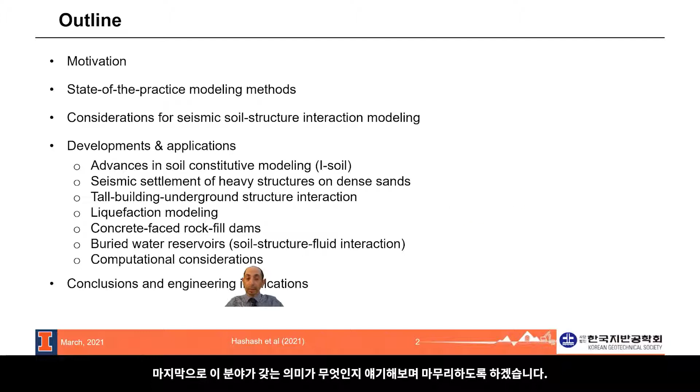Why are we interested in this? Our physical infrastructure is the backbone of modern society. We're interested in understanding its performance and resilience under extreme events, in this case under earthquake shaking. We're dealing with high-rise buildings, underground structures, deep foundations, bridges, and piers, and all of these end up interacting with the surrounding ground and with each other. We need to understand how these interactions impact the overall performance of our infrastructure.

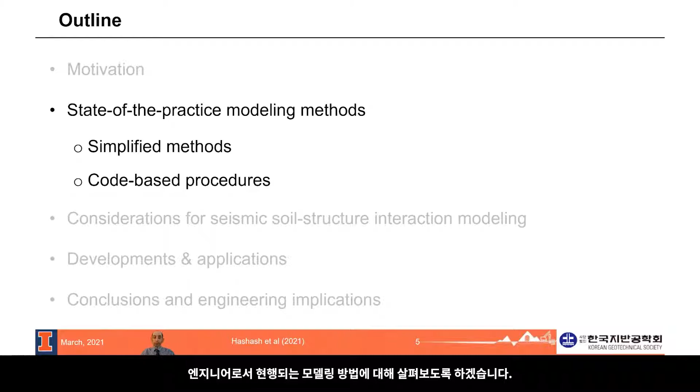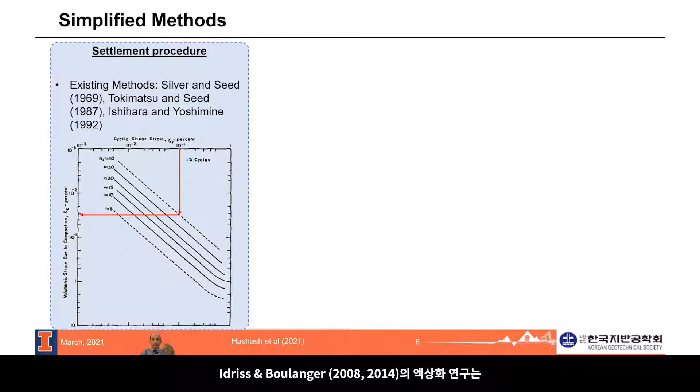Now let's talk about a sampling of state-of-the-practice modeling methods available to us as engineers to address these problems. We have a number of simplified methods. For example, for soils, we have simplified methods to estimate strain due to seismic shaking of sands, and from that we can estimate settlements. But this is decoupled from the superstructure that is, for example, placed on top of the sand.

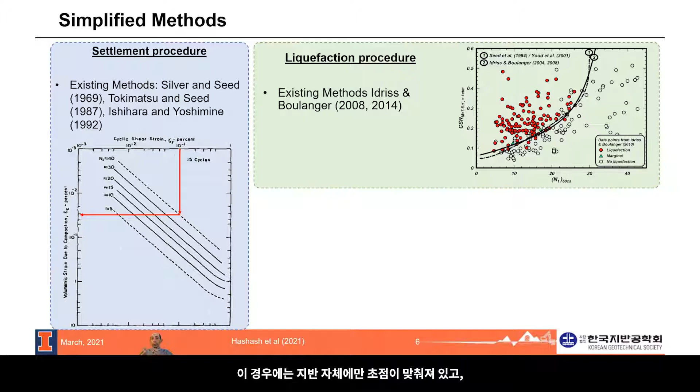Liquefaction procedures are widely used, for example procedures by Idriss and Boulanger, and we use them to evaluate whether soil is likely to experience liquefaction or not. But this is only focusing on the soil itself. There is no interaction here with the structure.

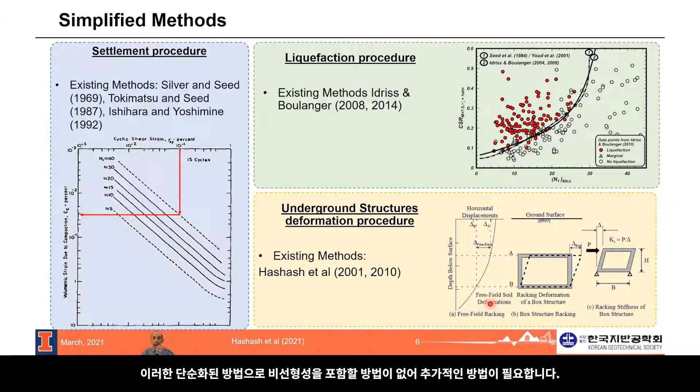These are some methods we developed for looking at the seismic interaction of underground structures. They are simplified: we apply racking displacements, and depending on the relative stiffness, we are able to estimate the deformations of the structure. But these methods are predicated on relatively small strains and elastic response of the structure, so we do not have in them the ability to incorporate nonlinearity using these simplified methods.

We need to do more. Codes are rich with procedures for evaluating structural response, all the way from a fixed base model to a complete system where you have a full soil structure interaction model. But nevertheless, the best way to do that using these simplified spring and dashpot methods is difficult, cumbersome, and often fraught with uncertainties due to our inability to characterize well these springs, for example.

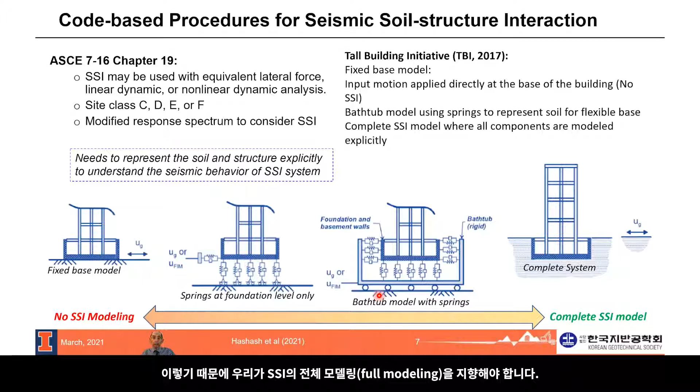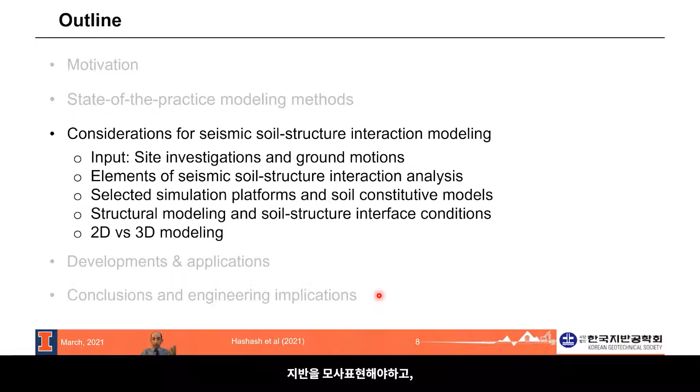So we need to model everything together, and that is really why we need to move into full modeling of the soil structure interaction to capture the behavior of interest to us. Now let's talk about the elements, the ingredients we need to conduct this type of modeling. We need to represent the soil, the structure, and the ground motion. In order to do an adequate soil structure interaction analysis, it is important that we do detailed site investigation whereby we characterize the ground and understand the stratigraphy and the soil properties of interest.

Now, why is the shear wave velocity important? Because it represents the maximum stiffness of the soil. The shear modulus is equal to rho times Vs squared, Vs being the shear wave velocity, so it's critical.

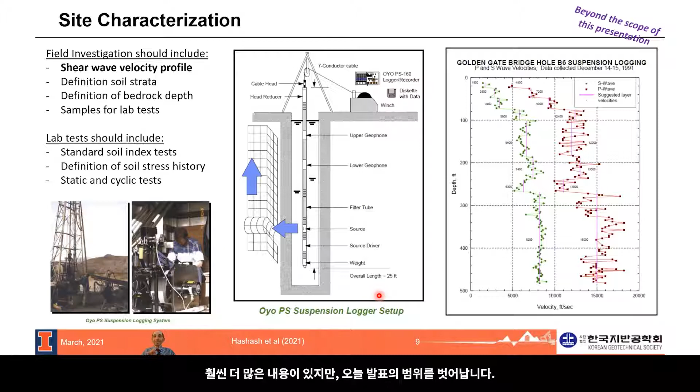There is much more to say about the importance of site characterization, but it is beyond the scope of today's presentation. In order to conduct a seismic soil structure interaction, it's important to represent the ground motion that is going to cause the shaking that we are interested in representing.

There are many steps one needs to take to develop those ground motions: conducting probabilistic and deterministic seismic hazard analysis, developing target spectra. It could be a uniform hazard spectrum, or it could be a conditional mean spectrum.

Then after that, we have to develop time series that match the response spectra. The selection of these time series, both horizontal components and the vertical component, is a significant effort. It's very important, essential for a successful and meaningful seismic site response analysis. However, this is beyond the scope of today's discussion.

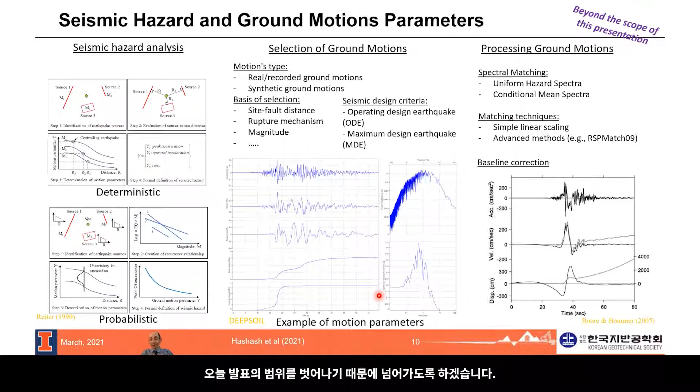Now, when we are thinking about seismic soil structure interaction and modeling, we want to think of a series of models, a sequence of modeling instead of a single analysis. First, we need to make sure we have a good handle on one-dimensional site response analysis.

You can use tools like DeepSoil or Shake. You can also assess liquefaction in the free field, just to make sure you understand what's going on at the site without the presence of structures.

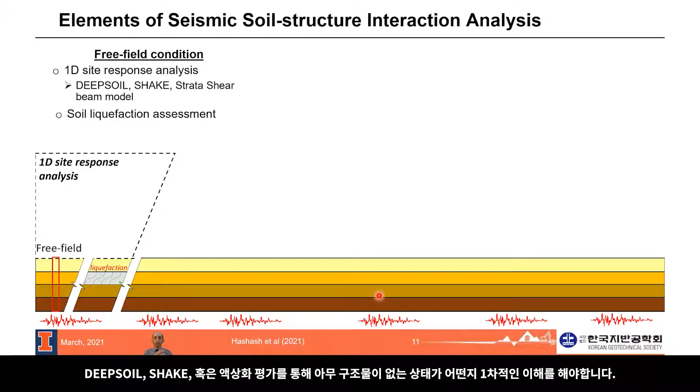Then we can start looking at introducing elements of the structures: tunnels, tall buildings, nuclear power plants, for example. These are very heavy structures. First we analyze them individually - the tunnel by itself, building by itself, power plant by itself.

Then we start looking at the interaction between these structures - structure to structure interaction. In this particular case, we are looking at a tall building to an underground structure interaction. And here we have other examples of interactions.

Now we're looking at a buried reservoir where we have to deal with the interaction of the soil, the structure, and the fluid, or a dam where we have to deal with the structure, the soil, and the fluid. So it's not just about structure and soil interaction, it's a structure-soil-structure interaction, or a structure-fluid-soil interaction, depending on the problem.

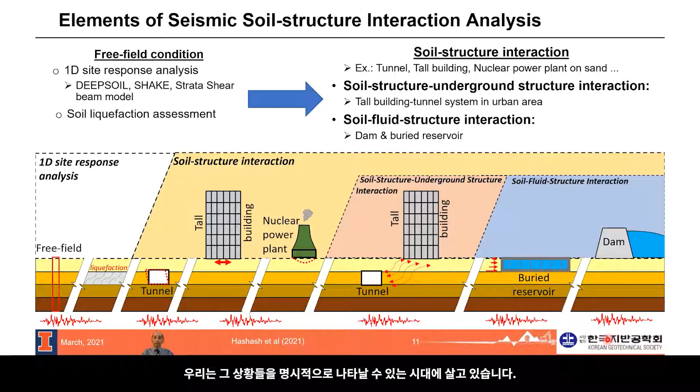And we are in an era where we can represent those interactions explicitly. In terms of analysis tools that are available to us, we have a number of analysis platforms, and I'm focusing mostly on commercial platforms that are accessible to both researchers and engineers.

You have FLAC, Plaxis, RS2, LS-DYNA, OpenSees, Mastodon, Abaqus, Adina. There are many available platforms for the analysis. From a geotechnical point of view, we often work with FLAC and Plaxis, whereby we can represent the soil well, but for the structure we often have to pay a penalty and simplify its representation.

In other software platforms - Abaqus, Adina, OpenSees, and LS-DYNA - one can have a higher fidelity representation of the structure and a good fidelity representation of the soil. In today's presentation, I'll focus on the use of LS-DYNA, being quite a versatile platform that we have used both in research and in engineering practice.

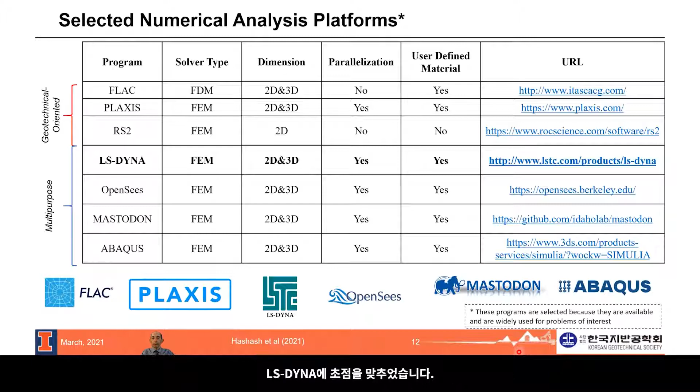There's a need, of course, to represent the structure and constitutive models for the structure, but of significant importance is the representation of the soil constitutive model, and that is often something we need to pay particular attention to. In LS-DYNA, there is a material called MAT79. I will describe it a little bit more as we talk about the modeling developments.

PDMY02 is available in OpenSees. It's mostly calibrated for liquefaction. It has Masing-type unloading, reloading, and it is a bit challenging to represent both modulus reduction and damping simultaneously in it. In Plaxis, we have the HS small model.

We also have PM4Sand and PM4Silt, and this allows us to represent some problems. And then in FLAC, there are a number of models, including UBC-SAND for representation of hardening, elastic unloading, reloading, and a number of other features.

Different platforms have different strengths and weaknesses, especially when it comes to working with very large problems. For that reason, we have chosen to focus our work, and what I'm presenting to you today, within the platform LS-DYNA.

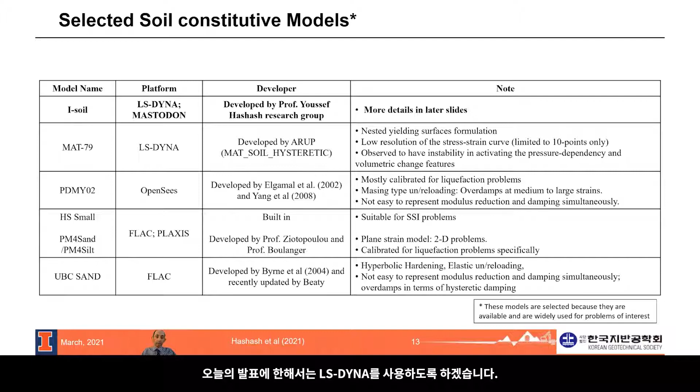In terms of structural modeling, we can model it either as a rigid structure, representing only the inertia as opposed to the modes contributing to structural response, or it can have lumped masses, frames composed of beam and shell elements, or a complete 3D structure with solid elements. It's often problem and platform dependent. The material can be linear elastic or nonlinear, and depending on the severity of the shaking, you may need a nonlinear representation of the structural response.

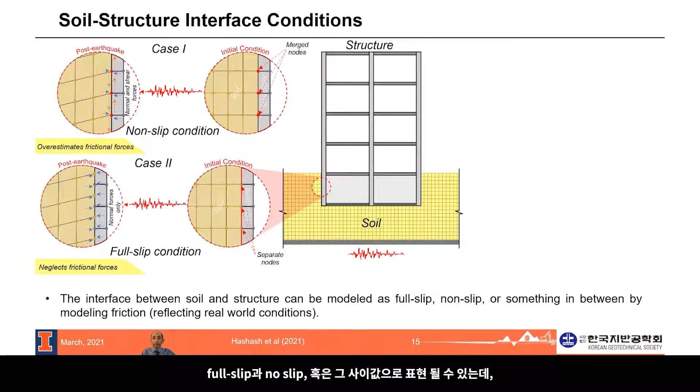Interface conditions are always challenging, and there are tools to represent full slip, no slip, and something in between. Often it is actually something in between, because that represents real world conditions. The modeling can be 2D or 3D, depending on the problem we have.

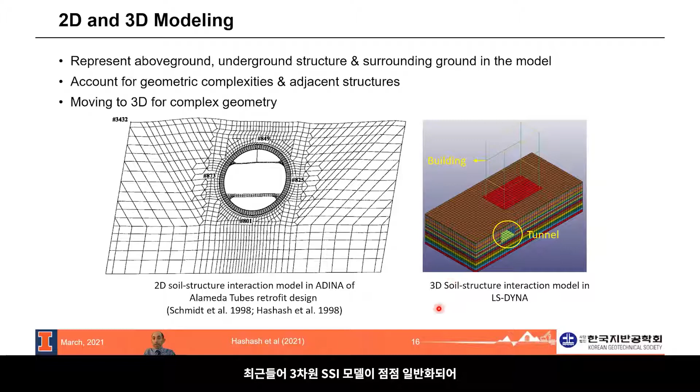Nowadays we are seeing increasingly common use of three-dimensional soil structure interaction, and that is the trend we are increasingly seeing in both research and practice.

So what are the gaps and needs that motivated the work we have done over the last almost 7 or 8 years in this area? What are the gaps in numerical modeling and material constitutive modeling? We need an analysis platform with higher fidelity representation of both the structure and the soil, as well as the interface. If you want to do high fidelity soil structure interaction, you cannot represent the structure as a simple pendulum, nor can you represent the soil as a mere spring. You need to explicitly represent both.

We need to be able to capture the 3D geometries, because they play an important role given the three-dimensional nature of the excitation, the ground shaking. We have structure-specific interactions, complex geometry, soil settlement, and also soil failure, including liquefaction.

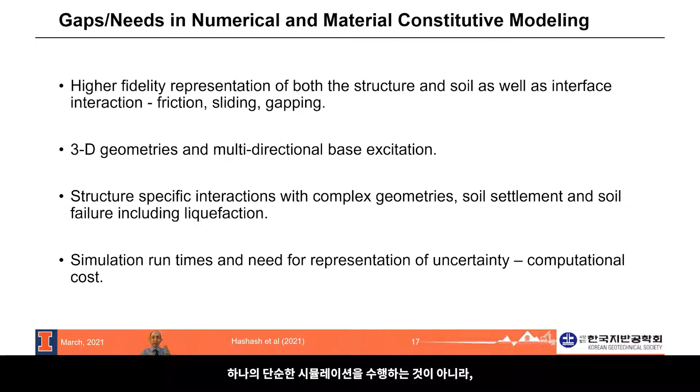We're interested in performance-based design, so we need to understand how all of these work together, and we need to be able to run these simulations efficiently while capturing uncertainty. So we need to run many of these simulations, and we need to be very mindful of computational cost. We're not looking at one simulation, we're looking at multiple simulations.

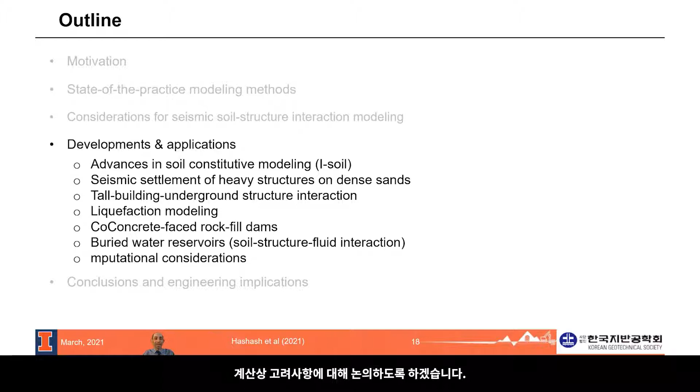Now I'm going to share with you the developments and applications in this area that we have performed. I'll talk about constitutive modeling, give you examples of five applications, and then a discussion of computational considerations.

Let's talk first about advances in soil constitutive modeling. When we started this effort a number of years back, we wanted a platform that is quite versatile and computationally efficient, and that was LS-DYNA. But we needed a material constitutive model that is robust and captures important features of soil response. This was really motivated by the problem of looking at settlement of heavy structures on dense sands, supported by the US Nuclear Regulatory Commission.

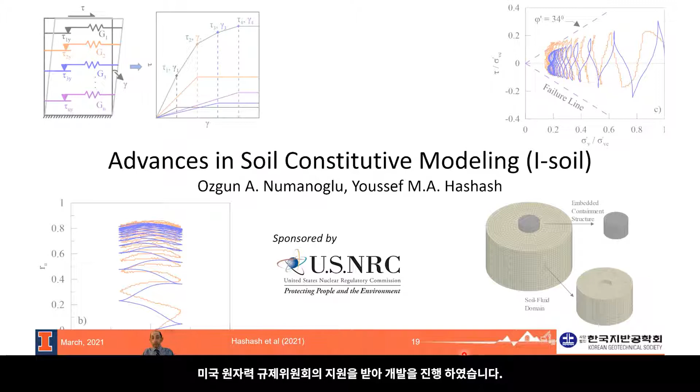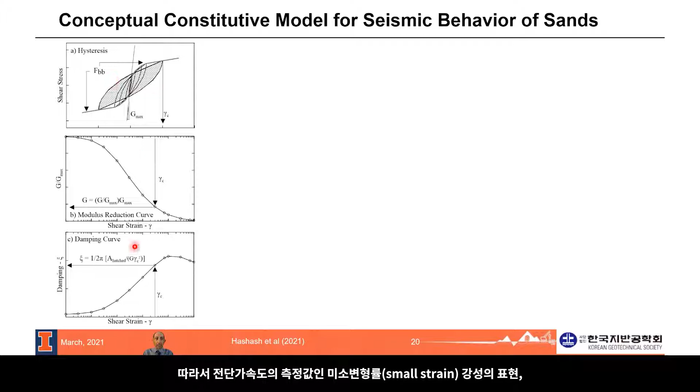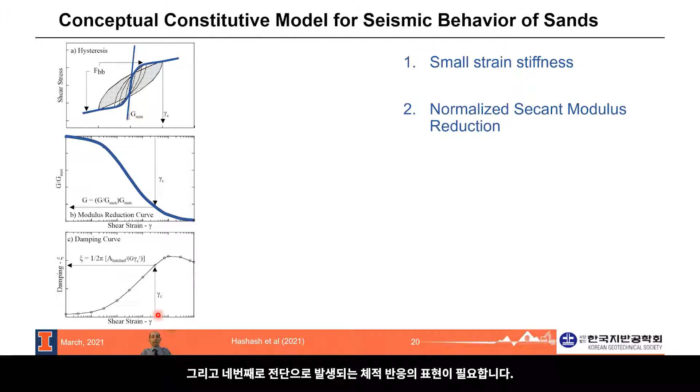If we look at a conceptual constitutive model for seismic behavior of sand, we need to represent the unload-reload behavior during cyclic loading. Looking at the backbone curve, we need to represent the modulus reduction with increasing shear strain, and the increase in damping energy absorption, which represents these hysteresis loops with strain. We need to represent small strain stiffness, measured by shear wave velocity, have an idea about the normalized secant modulus reduction curve, and represent hysteretic damping, which is non-masing, and that is important to capture. Fourth, we need to represent shear-induced volumetric response, which occurs in a drained response where water can dissipate and the sand can settle.

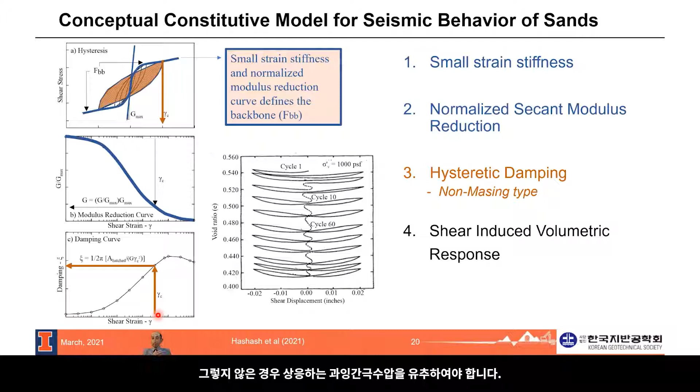In situations where these cannot happen, we need to develop the corresponding excess water pressures. We developed this at the University of Illinois as part of the PhD thesis of Ozgun Numanoglu, who has now graduated and is working in industry. We were looking at extending an existing soil model, MAT79, in LS-DYNA, which is based on distributed element plasticity model that was introduced by Chiang and Beck in 1994, and it was based on the Iwan 1969 model.

The reason we picked this model is because it is simple, elegant, and easy to implement and extend. The model formulation is a piecewise linearized hysteretic non-Masing type nonlinear model that can represent modulus reduction and damping curves, and it represents shear-induced volumetric strains and excess pore pressures. This is the I-soil extension of MAT79.

Initially, we used it to represent medium-dense to very dense sand behavior, but it's proving to be very promising for loose to medium sands. It's easy to calibrate and use. We use the analysis platform LS-DYNA. What we did not include was plasticity due to hydrostatic loading and isotropic critical state behavior.

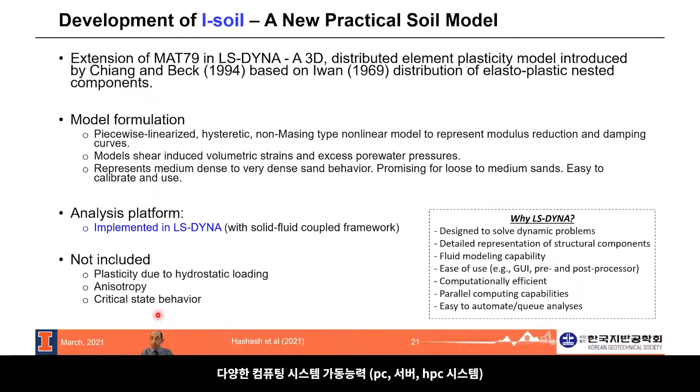Why did we choose LS-DYNA? It was designed as a framework to solve dynamic problems. It provides detailed representation of structural components, fluid modeling capability, and ease of use. It has a good, nice graphical user interface. It's computationally very efficient, with parallel computing capabilities, so it can run on a PC, a server, or an HPC high performance computing system, and it's easy to automate and queue the analyses.

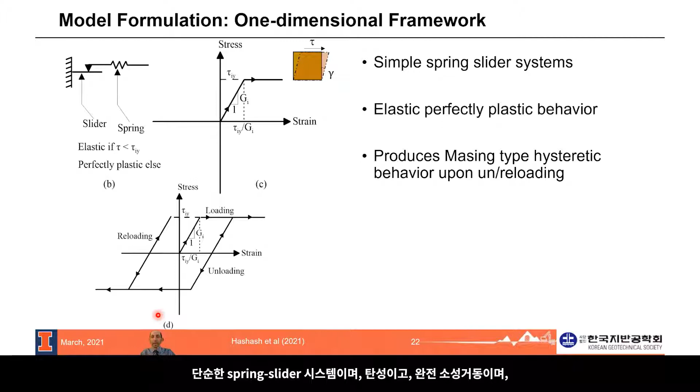It's really a very simple, elegant model in a one-dimensional frame. If we think about it in a one-dimensional framework, then we have to think about extension in three dimensions. It's a simple spring slider system with elastic, perfectly plastic behavior, and it produces Masing type hysteretic behavior upon unloading and reloading. Once you put several of them together, superposed in parallel, you can represent the stress-strain behavior of the soil.

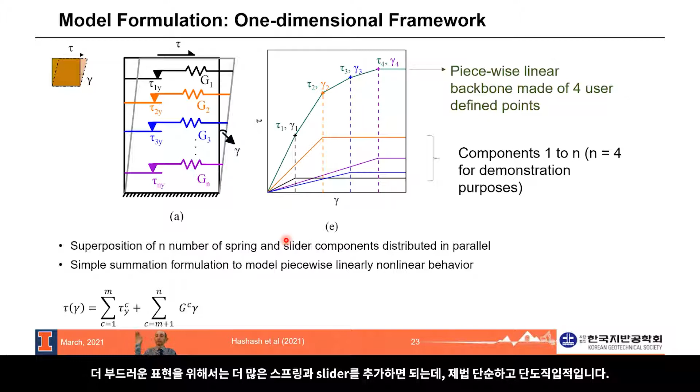You can have components 1 to n, and n is equal to 4 here for demonstration purposes. It's piecewise linear. To represent a smoother transition, you add more springs and sliders, and it's pretty simple and straightforward. It may seem computationally expensive, but it is not. It allows us to represent the normalized modulus reduction curves.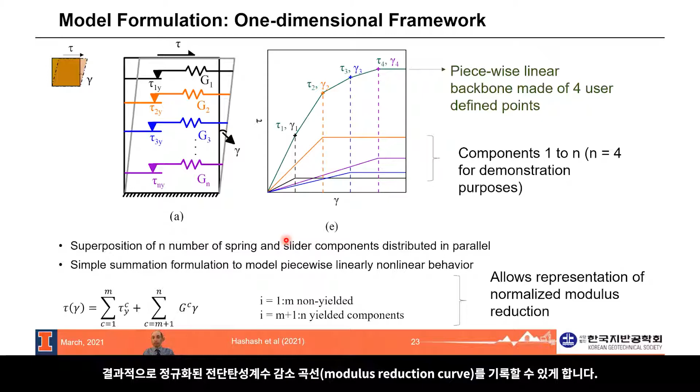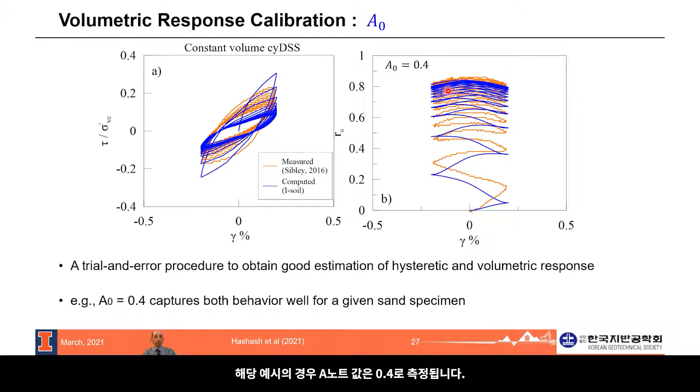We find that an A0 of 0.4, for example, captures this test well across cycle 1, cycle 2, cycle 3. Once you put them all together, we compare the performance of the model to a number of tests. This is from Sibley 2016, and we're seeing quite a good correspondence between the measurements, shown in orange, versus the model, shown in blue. We're also looking at pore pressure generation, showing the residual, and we're doing a pretty good job capturing the measured behavior.

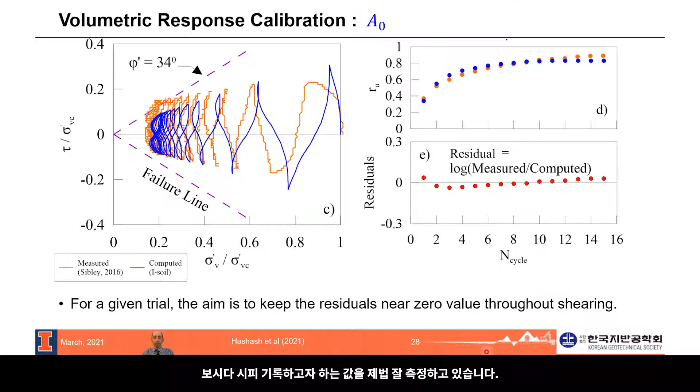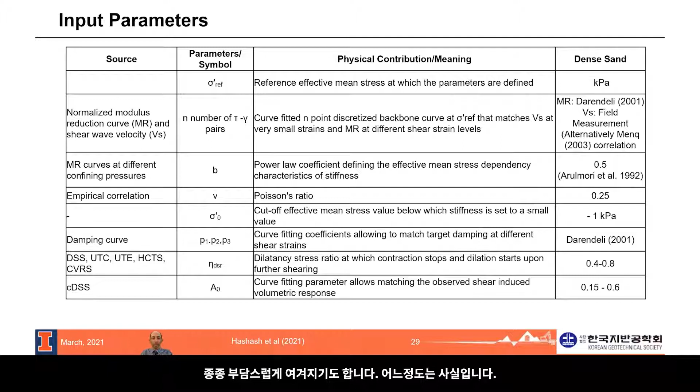Now, there are a number of parameters that this model requires, and that's often a vexing problem for people - it's like, look how many parameters you need. That is true, but the reality is these can be simplified significantly. All the parameters we have can be obtained from the modulus reduction and damping curves that we commonly use in 1D nonlinear site response analysis.

There are only two volumetric parameters, A0 and eta DSR, that we calibrate using cyclic DSS or empirical correlations. We have recommendations in the thesis of Dr. Numanoglu, but if you have your own tests, you can also calibrate these. So in reality, we only need modulus reduction and damping curves, plus these two parameters, A0 and eta DSR.

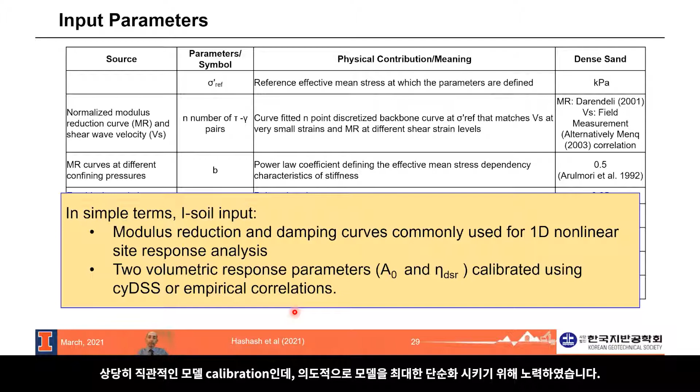Very straightforward calibration of the model, and we tried to keep it as simple as possible. So now let me show you examples of the performance of this model.

This is the first application, which was the original intended use of this soil model, to look at the settlement of heavy structures on dense sand.

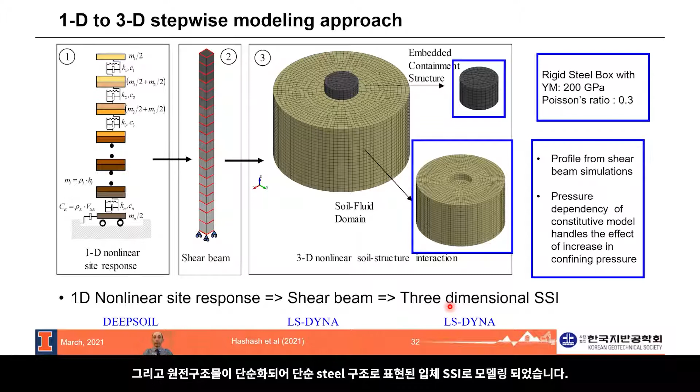We conducted a series of centrifuge experiments, bidirectional, so you can move in two directions. We placed a heavy structure representing a nuclear power plant, and we conducted both free field and experiments with the structure on it, and we shook it so that we can see accelerations, displacements, and settlements throughout the soil column. In doing the modeling for these experiments, we did one-dimensional models, then shear beam representation in LS-DYNA, and then a full three-dimensional model, whereby the structure was simply represented as a rigid steel box.

This is an example of the comparisons we had between the measurements and the computed result. Blue is computed in DEEPSOIL, this is a free field. Then we have the black, which is the LS-DYNA result. The orange color is measured, and the dashed line is input.

If we look at the surface here, the first column is x direction and y direction. We shook the structure in two directions, two horizontal directions. For example, this is the input, so that's not what we're comparing. We're making sure the input is the same, and then we look at the output.

You can see here that when we are modeling the soil structure interaction, we are representing the observations very well. We're looking at the response spectral acceleration, capturing it well across a broad range of periods. We're able to capture the Arias intensity and the Housner intensity well, the development of that.

And these are the settlements. It's showing us the trends of the settlements we are observing and the generation of pore water pressure. We did not try to over-calibrate this. We had a series of tests in the lab that we used to calibrate the soil model, and then used them in a predictive manner to represent the soil structure interaction.

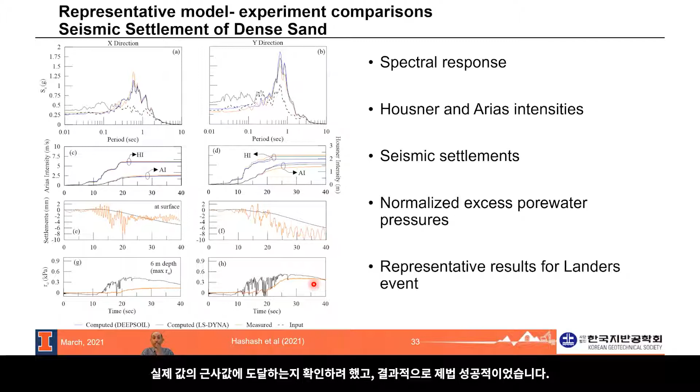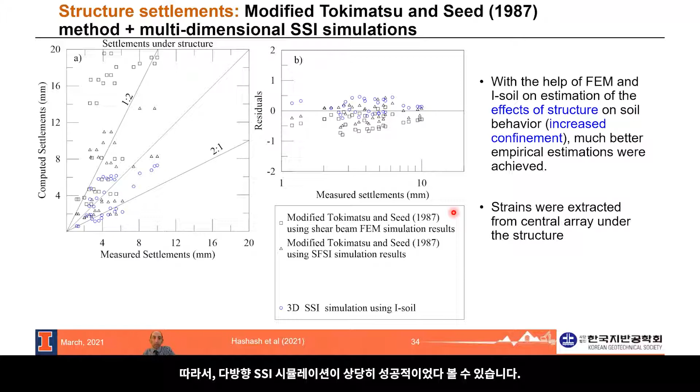There are other techniques we use, simplified methods versus the blue, which is the 3D SSI. You can see the 3D SSI model residuals - a residual, I should mention, is the relative error between the measurement and the computed value. The blue data represents the soil structure interaction, black represents modified empirical relationships. When we do the seismic soil structure interaction, we're doing a much better job capturing the behavior. A 1-to-1 gives you a perfect match, and we're hovering around that. So we are doing quite well there when we are using the multidimensional SSI simulations.

So we said, okay, this thing worked well for an idealized nuclear power plant. Let's work with a real one, the Kashiwazaki nuclear power plant in Japan, which experienced significant settlements and damage, and it led to shutdown. So we said, well, how about we try that one? There we're dealing with uncertainties with real measurements, real data, but that's what you want to do.

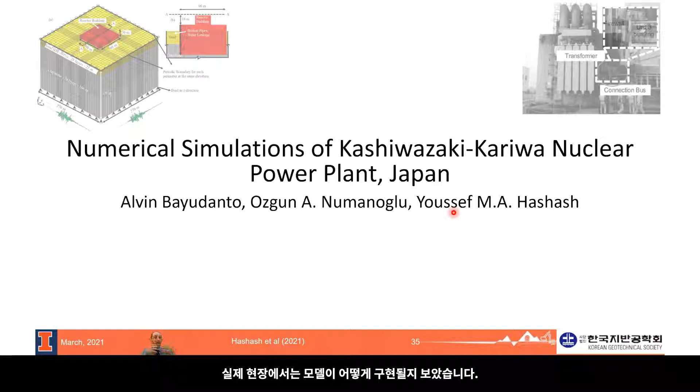First, we did it under control conditions, centrifuge experiments where we have a lot of control over the test. Now let's see under real world conditions, how does the model perform?

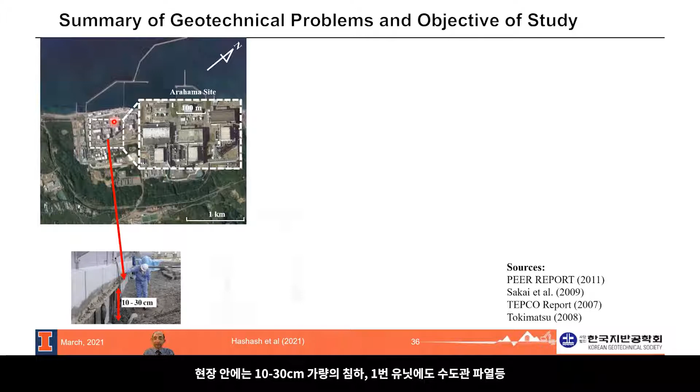So this is the site that we're looking at, this is an aerial photo. This is a site service hall where they've experienced 15 centimeters of settlement due to seismic shaking. At this site here, we had about 10 to 30 centimeters. And at unit 1, they had a rupture of the water pipes, all due to relative settlements. When you rupture water, you can have fire, and that can be very problematic.

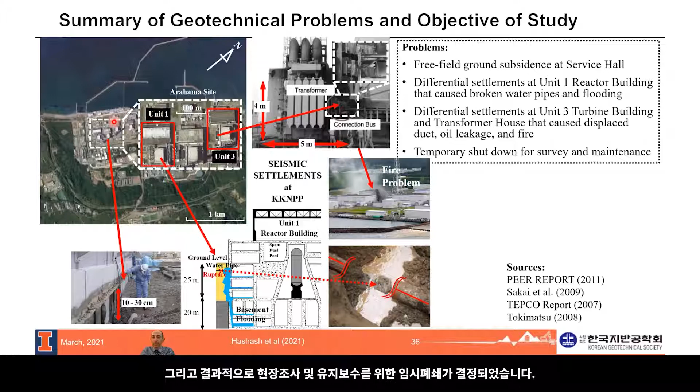So we have a free field ground subsidence at service hall. We have estimates of differential settlements at unit 1 reactor building, and differential settlements at unit 3. And then, of course, that led to a temporary shutdown for survey and maintenance.

The objective of our study was to utilize I-soil in LS-DYNA and evaluate these seismic settlements. So we represented the structure, the ground, and the model, and then we had to identify appropriate input motions at depth, and then we represented by proxy the location of either free field conditions or the building reactor or the turbine building.

So we represented all of those to look at the performance in each case. We ended up with 247,000 elements or 226,000 elements, depending on the unit. We used 4 physical cores and 4 logical cores. It took us about 15 hours in this case and 23 hours in this case. And by the way, this is for a problem that is that complex, that large. This is not bad. This was on a PC, a server with multiple cores.

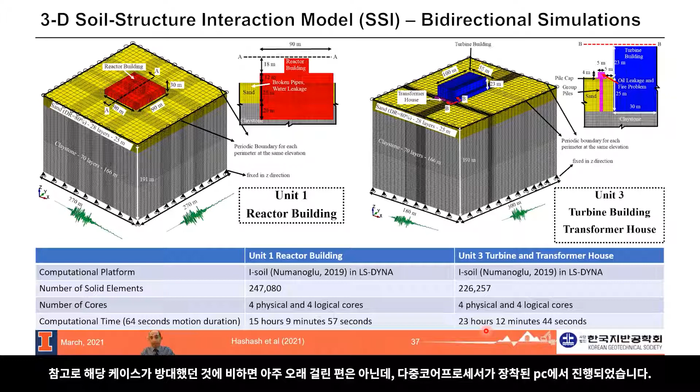And then we computed the settlements. Of course, from the site, we didn't have estimates of settlements with time. We only had the final settlements and the uncertainty in it, and here for this building as well. And we came up with values that are within the observed settlements. We were quite encouraged that this representation of seismic soil structure interaction did provide measures of settlement that are consistent with what was observed. By the way, we're not looking for exact. If we are there within the right order of magnitude, we are doing quite well. And we are quite happy that this is the case here.

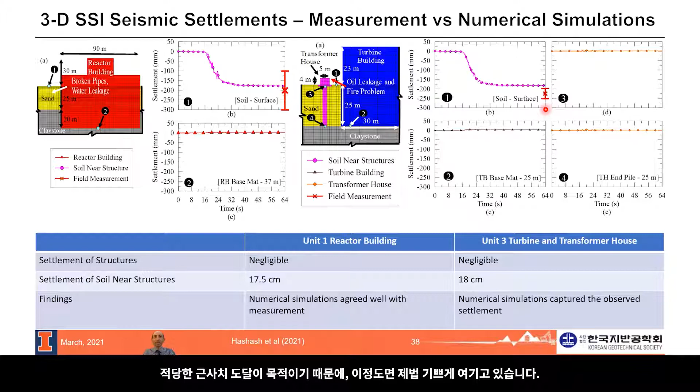Another problem that we had to deal with, and this actually started from a real-life project: we often now have, in major cities, high-rises that are built next to deep underground stations or tunnels. And all the design methods for the high-rises assume there's a free field around you, and for tunnels it also assumes there is a free field. They don't account for the interaction.

But if you think about it, when we design tall buildings, we're interested in the base shear. This is the inertial load that's shed into the ground. Well, where does that inertial load go? Does it stop at the boundary of the building? Probably not. It does not. So now if I put a tunnel next to it, what happens to the tunnel? How do I estimate the forces from the building? Do I just simply put the forces as is? Do I always assume an increase? So we needed to answer those questions, and that was a non-trivial problem for us to deal with.

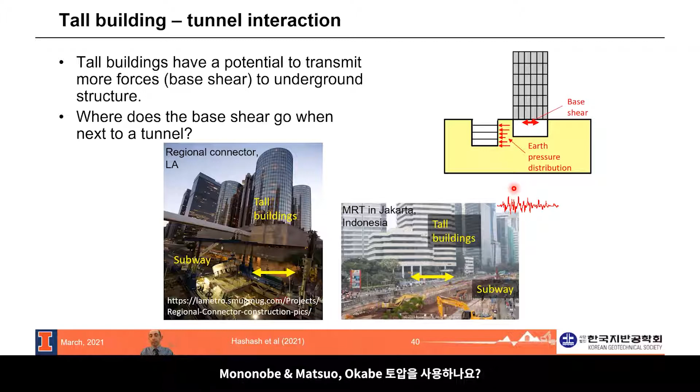So what we did is we embarked on a simplified way to deal with the problem. We wanted to study it. We looked at a simple representation of the building and asked, does it increase earth pressures? How much? Is it Mononobe-Okabe earth pressures? Which, by the way, don't work for most applications. So that was the purpose: to say, well, this is a real seismic soil structure interaction problem. How do we solve it? We need to solve it.

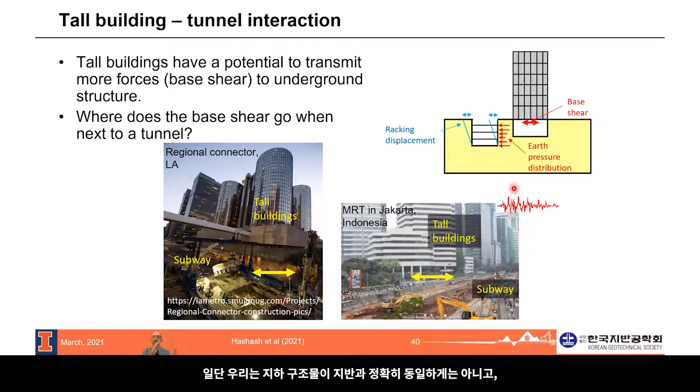So we know that underground structures will move approximately with the ground, not exactly the same, approximately. But now I have the structure next to them, what happens? For that, we conducted a very large study coupled with a major centrifuge experiment, whereby we put an idealization of a structure and a tunnel. We performed free field analysis, simulations and experiments, and then one with a mid-rise building and one with a high-rise building. We had to idealize it in the centrifuge because we had limitations in the height we could use. So for the mid-rise building, we can only capture 3 modes in the simulations. For the high-rise building, we can only represent 1 mode.

And of course, you say this is not necessarily realistic. I understand, but we needed to start somewhere. So we built models. We had the centrifuge experiments, and they were not easy to build, conducted in collaboration with Professor Dashti at CU Boulder. And then we conducted the simulations.

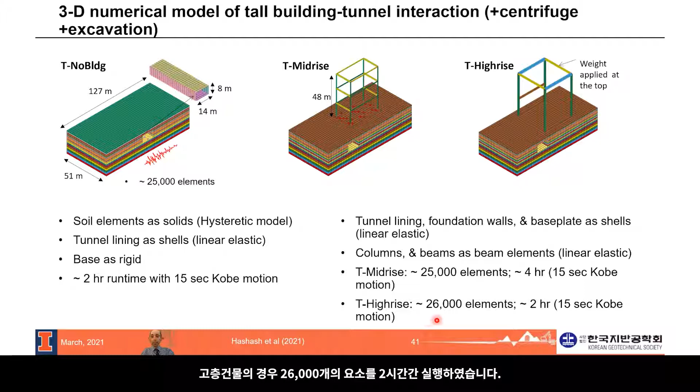And we had fairly large models: here we're looking at 25,000 elements with 4-hour runs, or here 26,000 elements, 2-hour run. And then we looked at, for example, the increase in thrust. We had to look at the free field condition, meaning there is no building, to see what kind of dynamic increment we have. And then we looked at, is there much increase? When you look at the mid-rise building, there's a little bit of increase, not a lot. But for the high-rise building, we do see a significant increase.

That has serious implications, because usually the group that builds the tunnel is not the same group that designs and builds the high-rise building. When building a tall building, they're not thinking that in the future there will be a tunnel, and when someone builds a tunnel, they don't think there will be a building. These are very serious implications we need to pay attention to, because they do impact and result in real consequences.

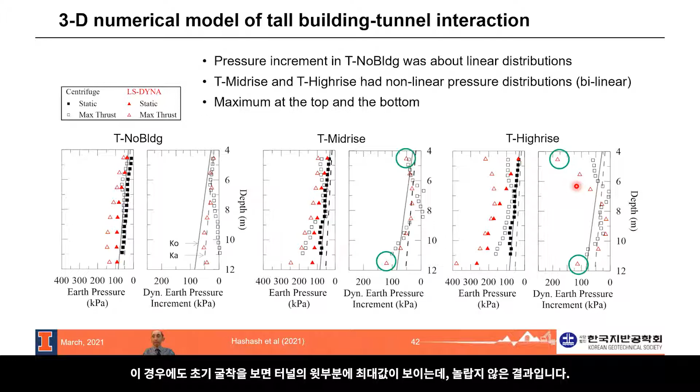For example, here at the top part of the tunnel, we can have the excavation, with a significant increase in that. So we're seeing maximum at the top, which is not surprising.

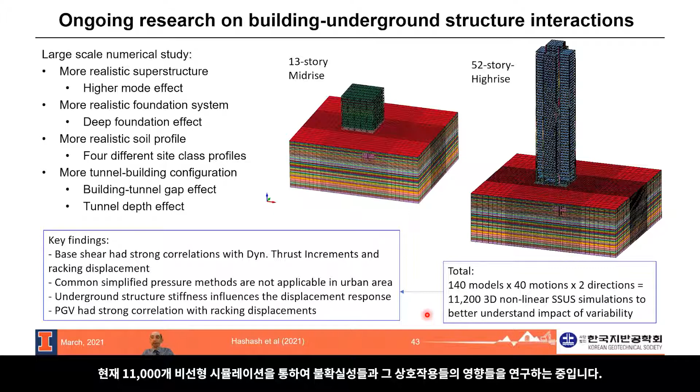Currently, we are conducting simulations with far more realistic representations of the building, with all their modes, not just the simplified models we had to deal with in our centrifuge experiments. We're looking at more realistic deep foundations, more realistic soil profiles, and the impact of how far the building is relative to the underground structure. We're running 11,000 nonlinear simulations to better understand the uncertainties and impacts of these interactions.

So now we looked at settlement of a heavy structure, both under idealized conditions and real-world conditions, and we looked at simulations of building-tunnel interaction. Another issue for us was how well our model represents liquefaction, because we are interested in soil structure interaction within a liquefaction kind of environment.

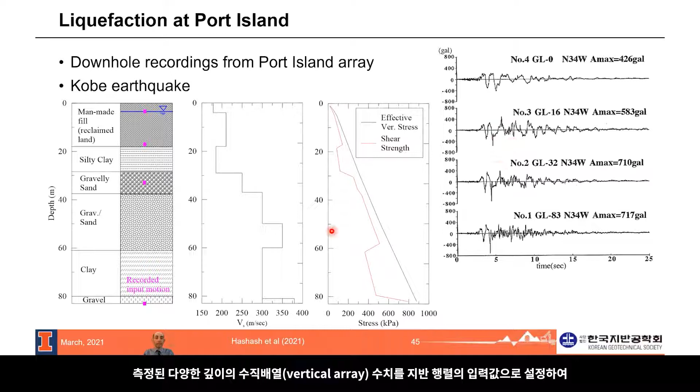For that, we used the vertical array at Port Island, in collaboration with Professor Idriss. This is Port Island, a fill island in Kobe, Japan, where they had a vertical array with measurements at various depths. We used this input motion and the soil column to try to estimate what the computed surface response will be.

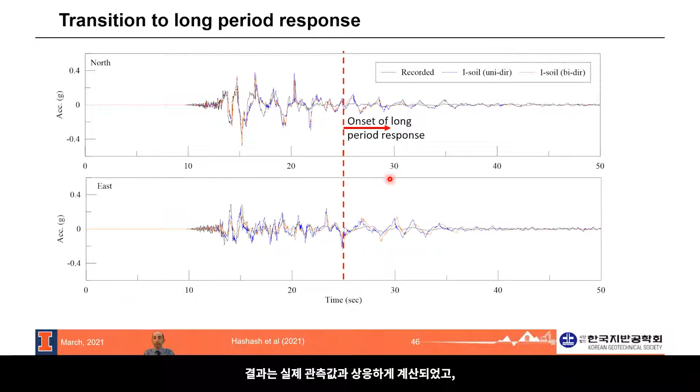We actually found that we are able to represent the observations, and we are able to see the onset of liquefaction when we start seeing the development of long period response.

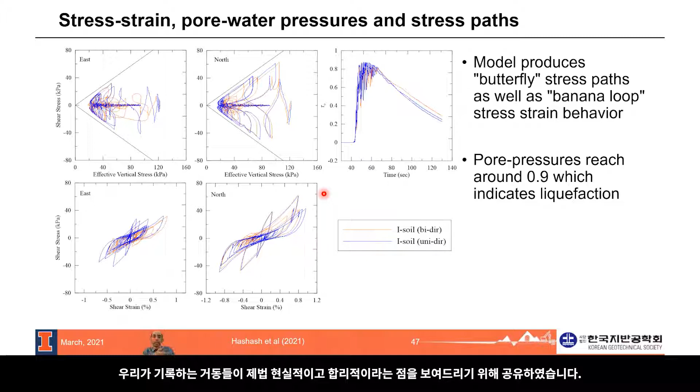This digs a little deeper to look at the stress path and the development of these dilation spikes that you often see. We don't have measurements of those, but I'm sharing these to show that we are representing behavior that appears reasonable and realistic.

So we took that and are now applying it to LEAP centrifuge experiments, with a far broader set of experiments we're also comparing against. This would be part of Mr. Guang Chao Singh's PhD thesis.

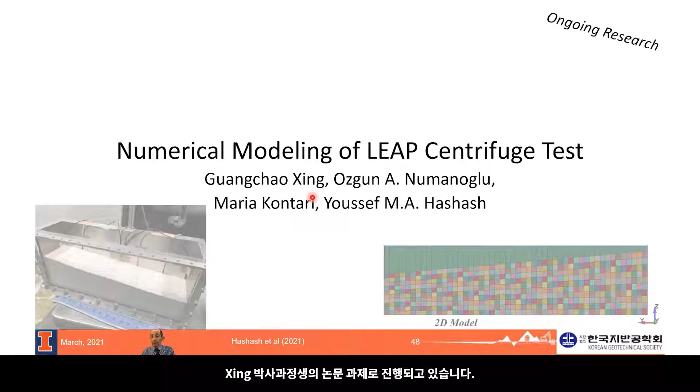These LEAP experiments were centrifuge experiments of a sloping ground with water, performed at different institutions. We developed the soil column for it: shear wave velocity, relative density, vertical effective stresses, friction angle. This is the model they're working with.

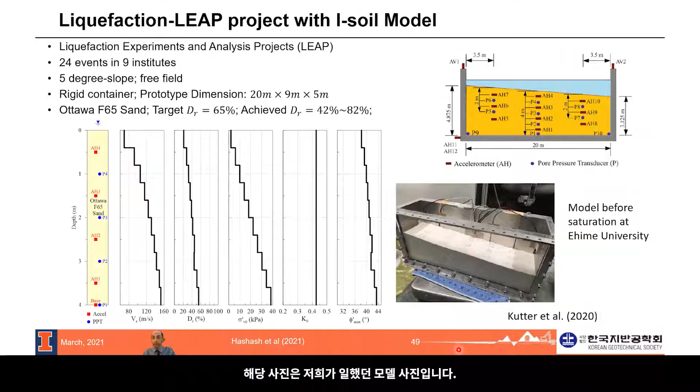We represented that in LS-DYNA. Both were able to represent the fluid. Here we represented the fluid as an elastic element, as opposed to something a bit more advanced, which I'll highlight in a minute.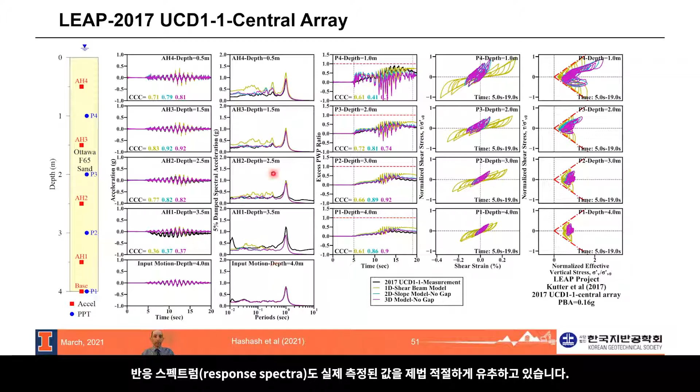We're showing here the stress paths, but we don't have measurements to compare with, though we want to see the difference in behavior. We're able to capture the buildup in pore pressure, which is really important, as well as response spectra that are quite reasonable and representative of what was measured.

Now we'll take you to another problem, a water-filled concrete-faced rock-fill dam, based on a series of experiments that the late Professor Kim from KAIST shared with us. We're really grateful for his generosity in sharing the data, and we were very saddened to hear about his passing.

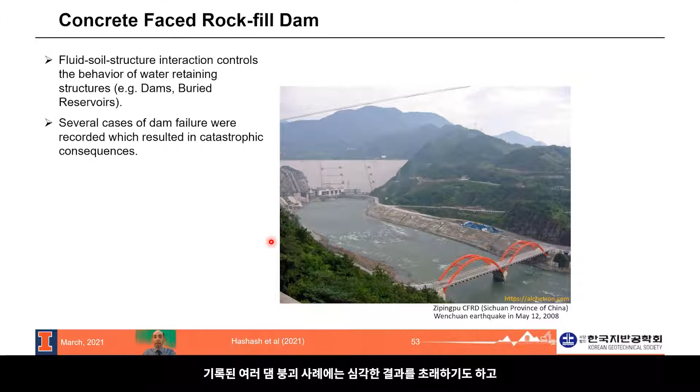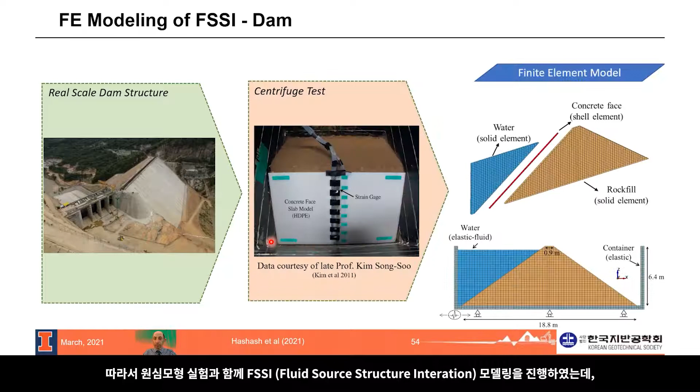This is a fluid soil structure interaction problem, where we looked at the interaction of the rock-fill dam, the concrete face, and the water behind it. There are a number of recorded cases of dam failure with severe consequences that could potentially become catastrophic. So we had these centrifuge experiments, and we've done the FSSI modeling, which is fluid soil structure interaction modeling.

You can see here the computed result with, depending on the type of relationship, we have non-Masing with friction contact and Masing with welded contact, and then the measurements. We're seeing very good correspondence between the most representative behavior, which is non-Masing with friction contact, and the measured behavior. The hysteretic behavior of the rockfill is very important to capture correctly so you can reproduce the observations, which in this case are from the centrifuge experiments.

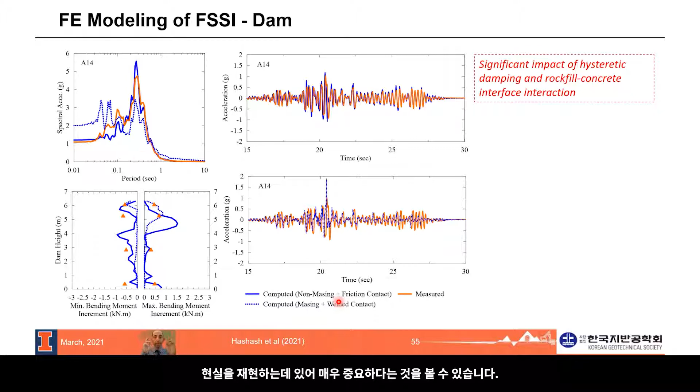Now I'm going to talk about another problem that also involves fluid, which is buried reservoirs. This is seismic fluid-structure-soil interaction of buried reservoirs, which are commonly used in the US as well as elsewhere around the world. So let's talk about the problem.

In many parts of the United States, water supply reservoirs in cities are being placed underground on hills so you can supply water by gravity. These are built as concrete structures, very large and very wide. They almost have the shape of a pizza box, and the vertical load of the roof is supported on columns, with fluid in there for the water.

And the question is, how do I estimate the seismic response of these structures? Simplified methods really do not capture this. It's difficult to figure out how to use simplified methods, so that's really difficult. Code-based methods are not applicable, and so really the best way is to have the full soil-fluid-structure interaction model.

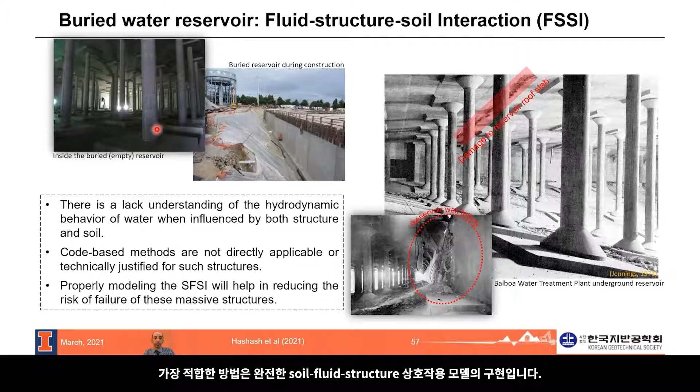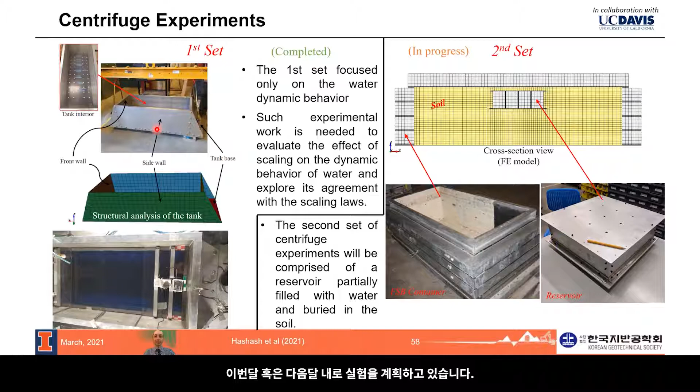In order to do that, we are currently conducting a series of experiments in collaboration with our colleagues at UC Davis, whereby we represent first the fluid and structure interaction, and then soil-fluid-structure interaction in the centrifuge, and reproduce that in our simulations. We have gone through the first phase, which is completed, the fluid structure interaction. Now we are working on the fluid-structure-soil interaction, which we hope to start this month or next month. This is an example of what you can do in these simulations.

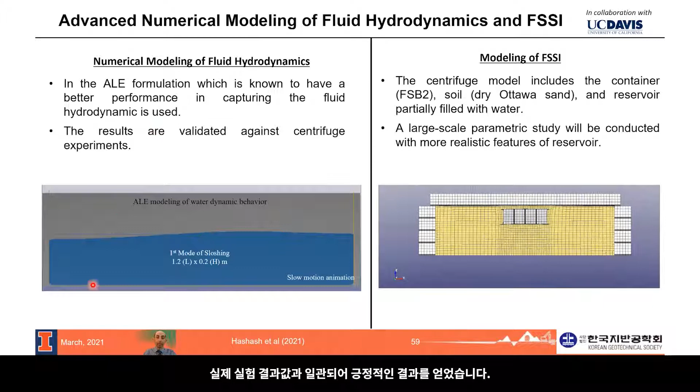We're representing the fluid using an ALE formulation, which provides better performance in capturing the fluid hydrodynamic response. The results are quite promising and are consistent indeed with the experiments.

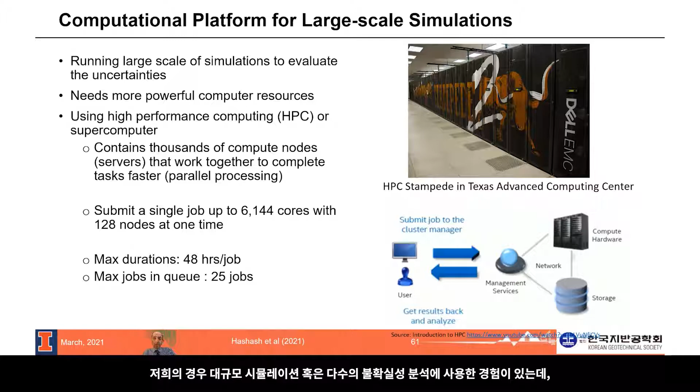These simulations are computationally demanding, so we need to make sure we're able to run them either on small servers, which I have several of in my office, or on high-performance computing systems. We've used large-scale simulations, so we can run very large simulations if we want, or run a number of uncertainty analyses.

These are some comparisons of compute node specifications, and some examples to give you a feel for how the simulations scale depending on the number of cores: 4, 8, 16, one-to-one here. Speed up is what you desire, but this is difficult to achieve. The green is the scale-up we've seen on our Windows machines versus on HPC machines on Stampede, at the University of Texas at Austin, and this runs much faster there. So many of our simulations we are running on these platforms.

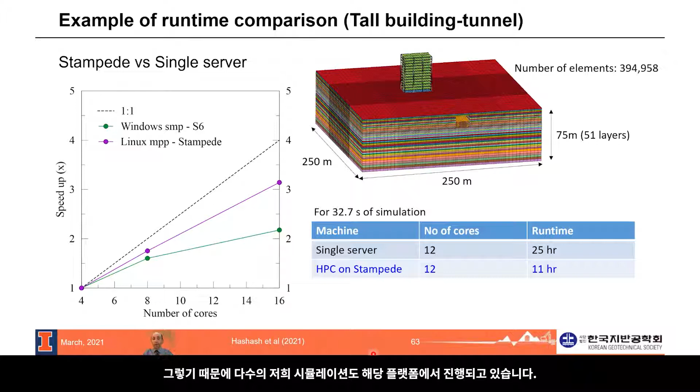That leads me now to our conclusions and engineering implications. The advances in analysis software, computing hardware, and big data management tools have enabled a new era in the analysis of complex nonlinear seismic soil structure interaction in 3 dimensions, and I can add to that also fluid.

We've demonstrated these successfully for a number of problems: settlements of heavy structures on dense sand, tall building tunnel interaction, soil liquefaction, concrete face rockfill dam, and buried water supply reservoirs. Very promising, and I expect that to be the wave of the future. We just need to pay attention to the computational needs and costs, but we gain insights that are very difficult to gain using simplified decoupled simulations or simplified 2D analyses.